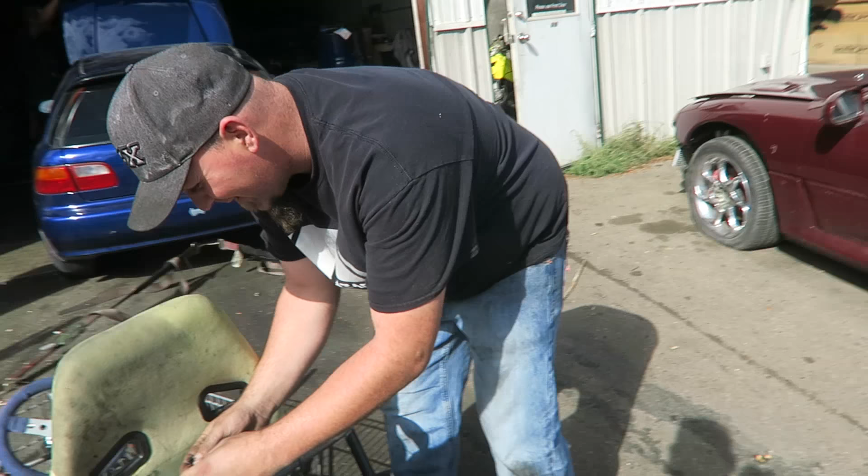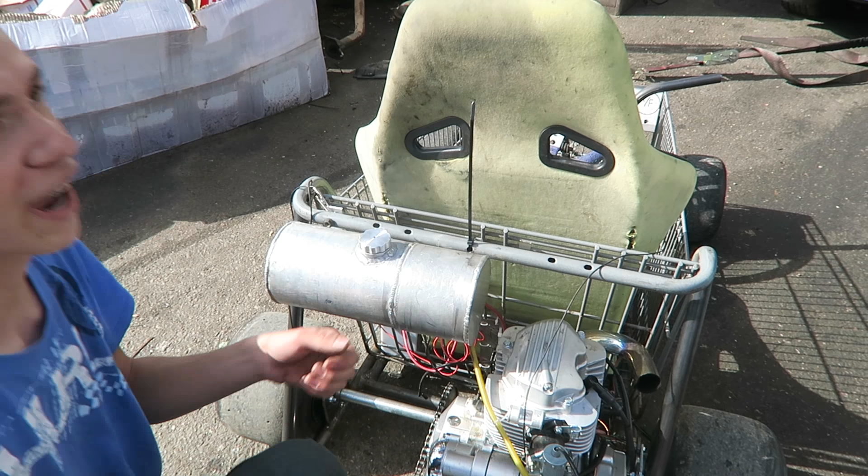You just run a zip tie through that bracket for that. Yeah, I need to, I forgot it didn't have brakes. And that's like going downhill. It rolls really good now, so it just goes. Those are some of the better wheelies it's ever done too. It scraped the back. Yeah, I can feel it, I can feel it ride it out. I'm pretty tall, but it's very uncomfortable. I mean, it's not horrible. Oh, yeah, oh that's snug. Snug fit. No, don't with that. It doesn't shut off.

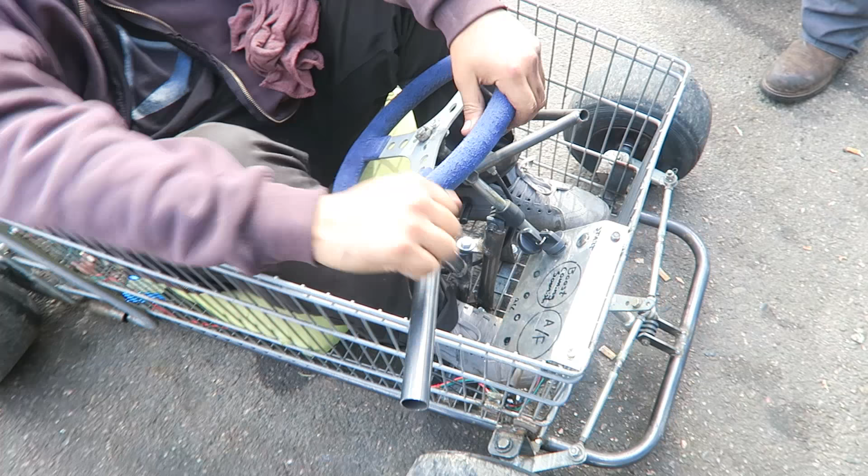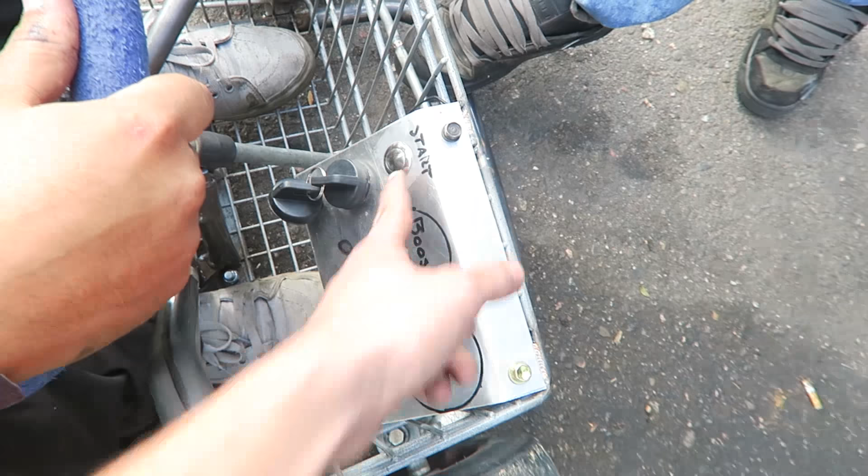Bro, I feel like I'm just gonna flip over. You better go try it out. Oh, you killed it, you killed it. I feel like a midget. Well, get riding it, look how you have to hit the gas. You gotta ride, how do you ride this? There's no kill switch, so there's no brake. So if you get stuck in gear... how do you get stuck in gear? That's the clutch, that's your clutch.

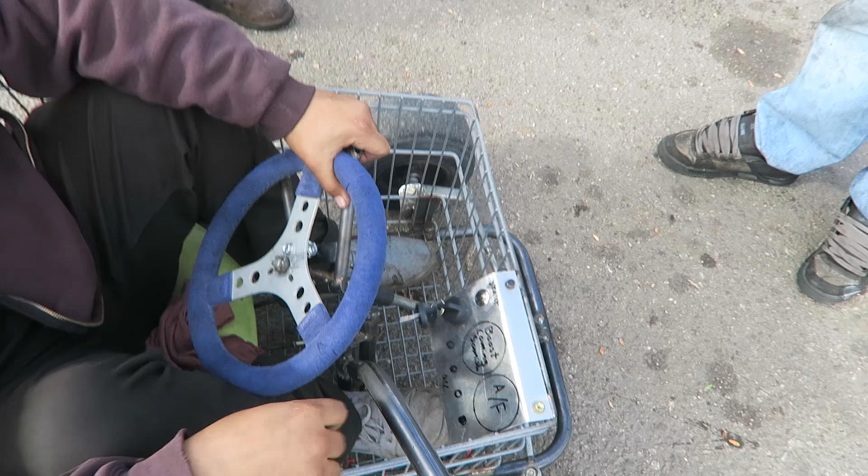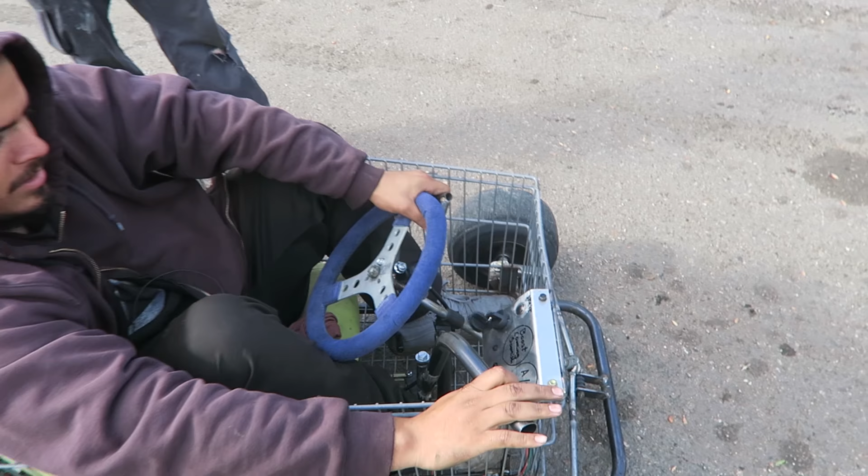And how do you... so one forward is first, and then all the way back is the rest. Alright, and then how do I turn it off if I need to? You can't. The key? You can't. No, where's that black— the key doesn't work. He's sitting on it. There's this, I kill it with this right now. It's the choke. What do you do with this? I pull on it. Hold on, don't give it a lot of gas. No, this is sketch, only this. Hey, just leave it in first gear.

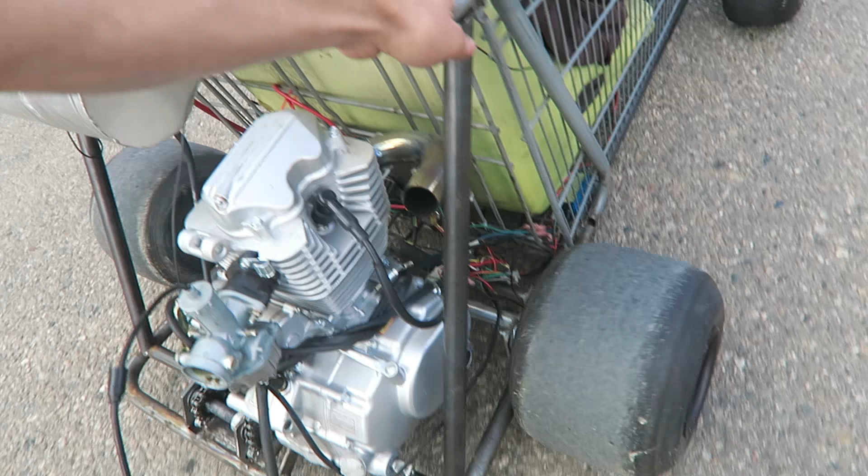Oh my god. Oh, it doesn't— doesn't sound right. Hold on, stop it real quick. Yeah, it sounds like it's not getting gas or something. Oh Jesus, I'm surprised you could drive it, honestly.

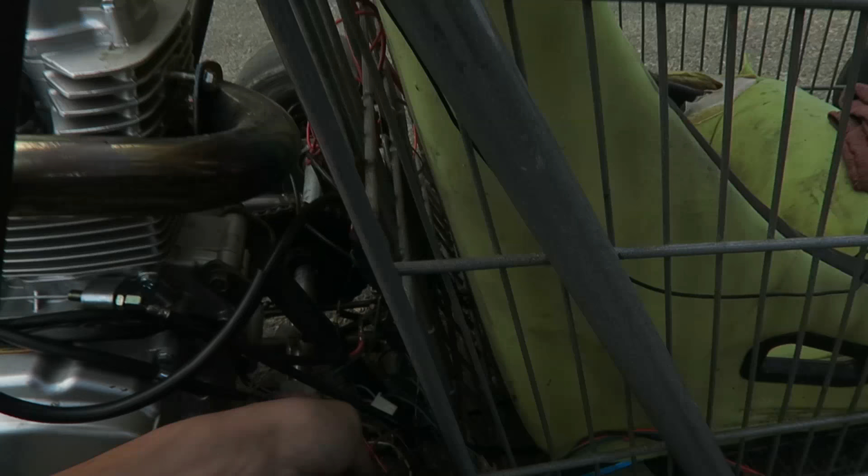Why? It's not that hard. I mean, yeah, it's not that bad. It just doesn't stop, yeah, it needs sketchy brakes. Damn, look at the wires. You like it though? Hell yeah. Feels fun? Nice. Yeah, I need to fix up some stuff still. We just need to get some brakes. Yeah, it really needs brakes. A cutoff switch, that's the only thing I was sketched about you driving is because there's no brakes, and it is kind of different though.

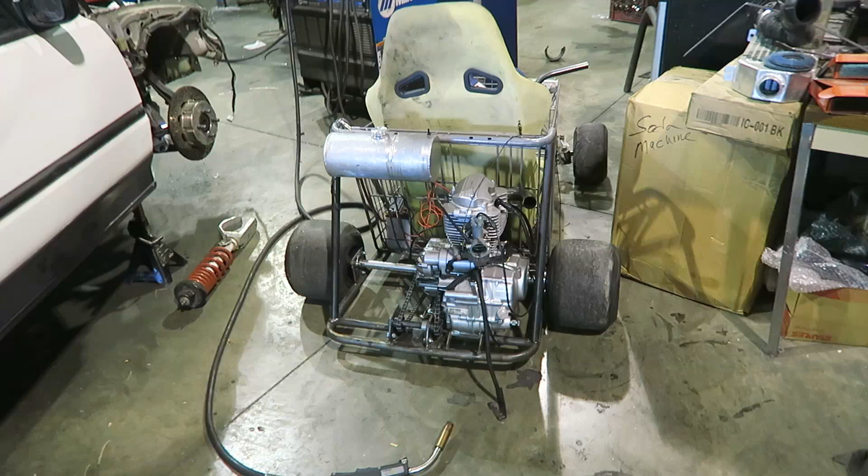So Brent has a car on the dyno right now, but while we were driving this thing around, this back support that I just put on broke at the bottom because I just have it tacked. So I got it all the way in the back of the shop, and I'm gonna get it welded up real quick while he's tuning that car.

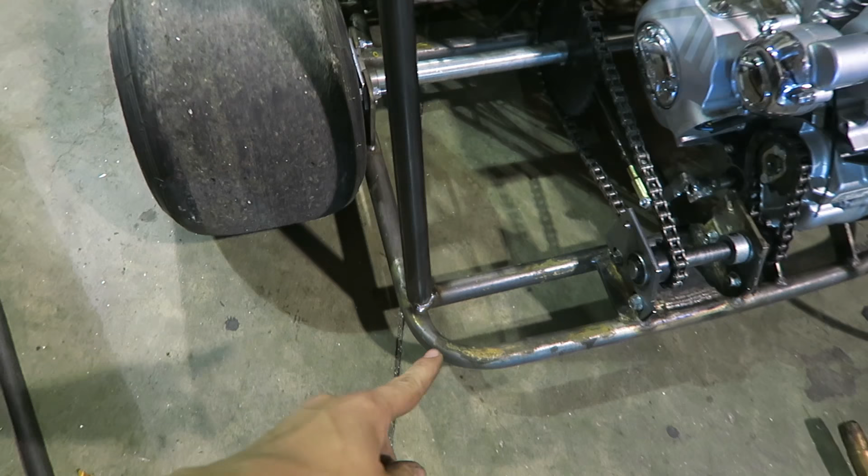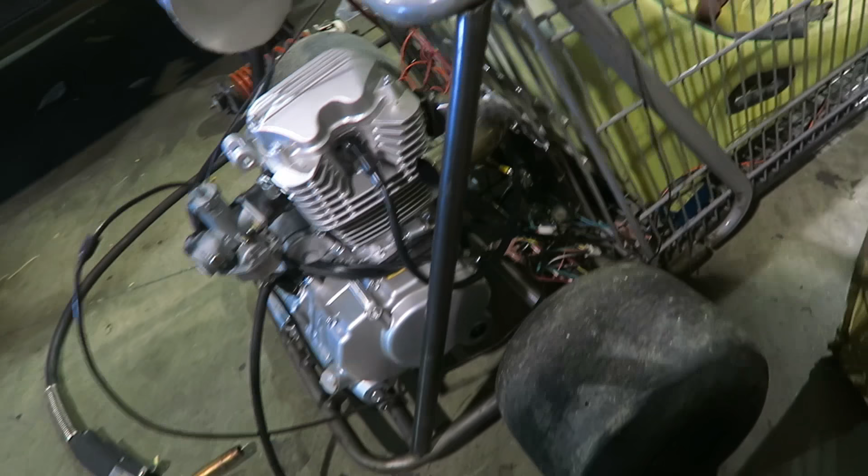But I did not tell you guys about these yet. I did add these the other day. These will add some strength to this back piece right there, because when it's doing wheelies and everything, it's putting a lot of load on the whole back of the kart right here, and it's kind of flexing that whole back piece. So these will be a really good support to have, and it also makes like a nice triangle right there. Not sure how I like the look of them, but they will definitely help with the strength of the frame. I'm gonna get them all welded up so they do not break off again.

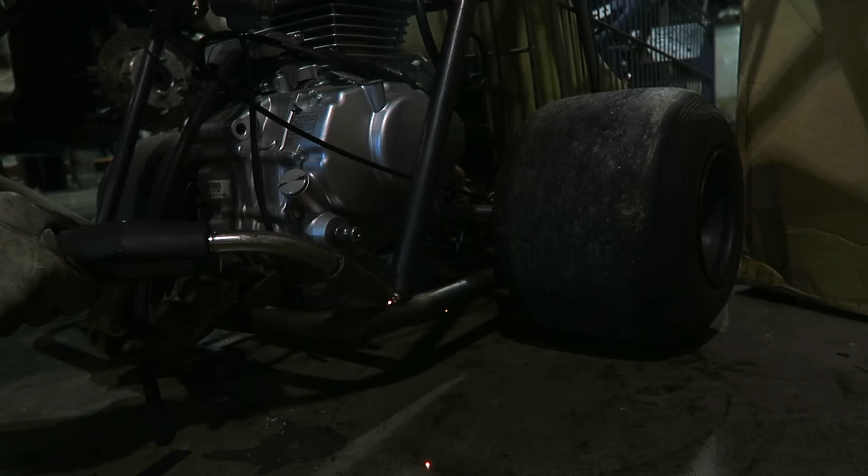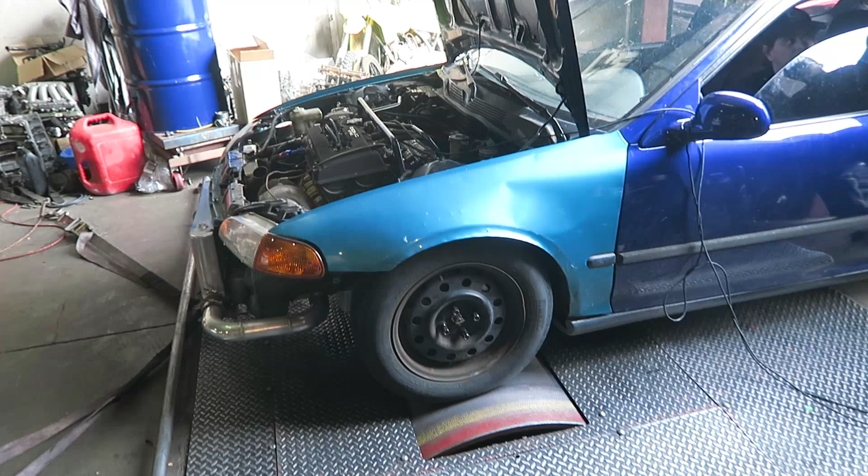Getting the Civic tuned. Yeah, need some dyno sauce. Trying to figure out that fourth gear from last time. Dude, I bet it was just because you didn't have gas. It was probably most likely. Yeah, it was under a quarter tank. That's probably all it was. But now it's full, so we'll see. About to lay down some real power. Hopefully it was just that. Yeah, I guarantee it was that, because my car does the same stuff. Right, yeah, at a quarter tank.

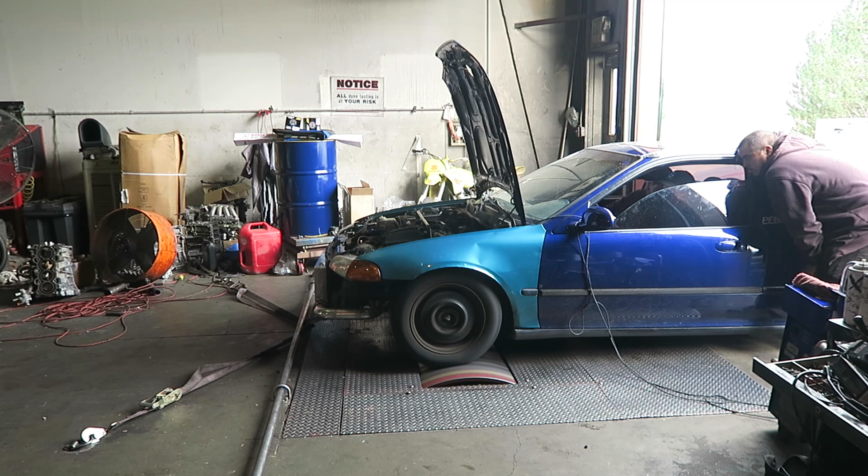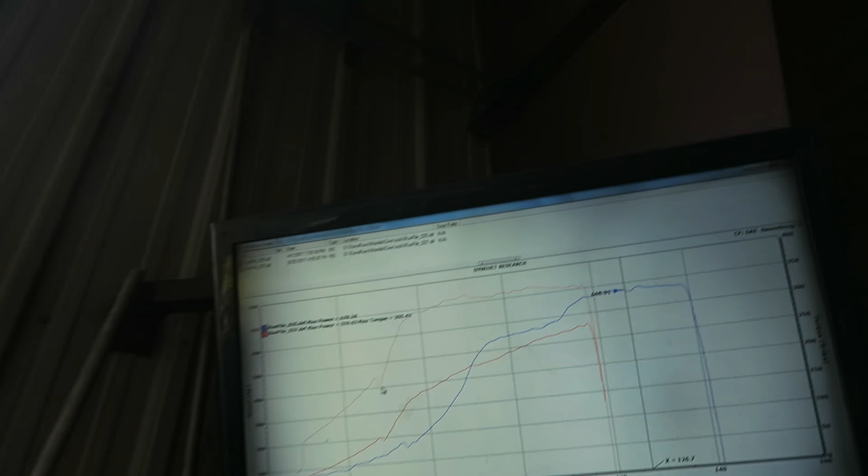Damn. 678, that's all it was. No, 559. Oh, 559? Okay, so it needs to be turned up. It only hit 18 pounds. But still, that's all it was then. Yeah, it was just the fuel the whole time.

Well, now you know for next time you go back to the track. No, half a tank, it was at half a tank and it was still breaking up like that. At the track it was? Yeah, and it was still breaking up like that. So it needs to be full. Yeah, you probably need to adjust that fuel pump, for sure, get it down in the tank more. Yeah, because it sits up too high so it doesn't draw.

At least you know. I'm glad that's all it is, really. Yeah, something stupid, you know? Well, time to turn it up. Yeah.

I want to see you make 700 again. Yeah, we wanted at least 7. Yeah, at least 7. Let's see what it does.

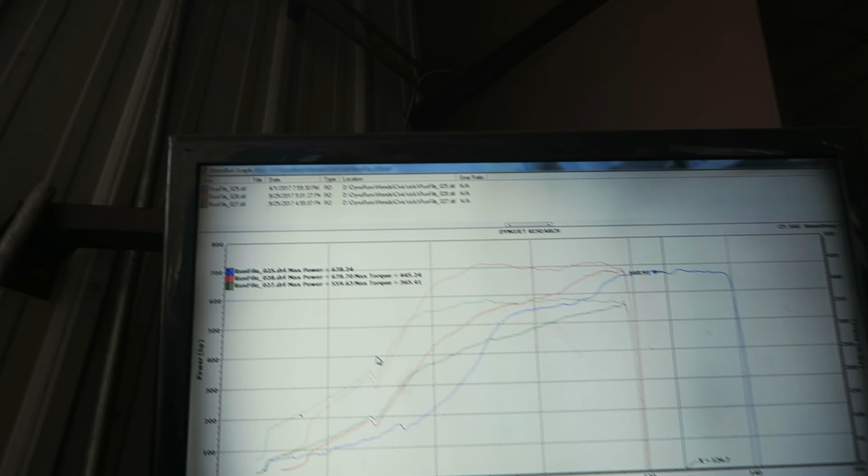678. That time I made 678. Same exact horsepower as before. Almost 700.

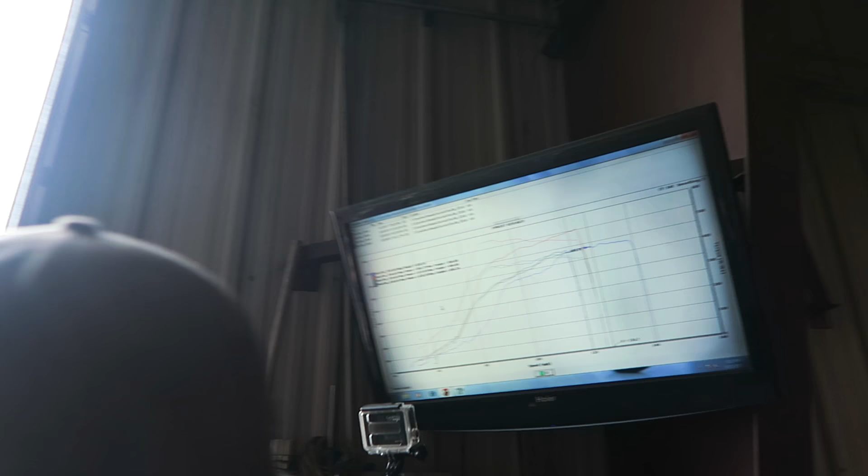Holy shit! 802 horsepower, bro. Holy shit.

You literally just said Ricky will be happy at 800. 81% duty cycle, 30, god damn, that's crazy. 80% duty cycle, dude, this thing's gonna get down. He said he wanted to turn it up. Wow, holy crap, that's gonna be fun.

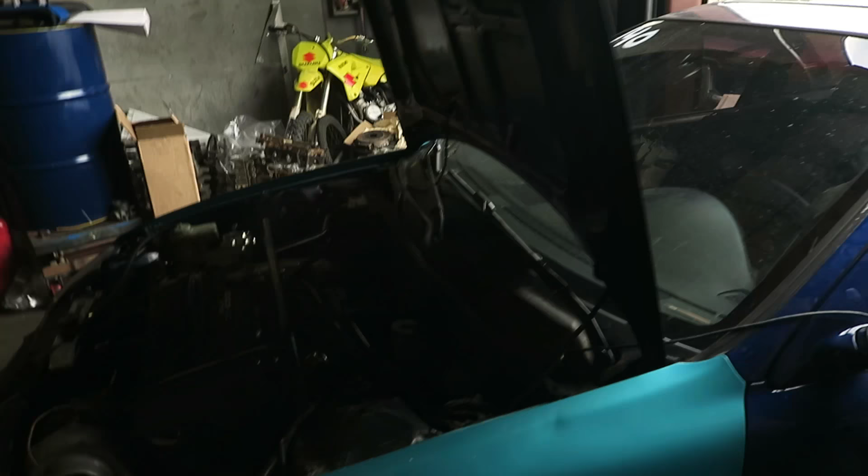I honestly thought something broke when it backfired. I thought something- I saw, staring at the gauge, it went to like 35. I was like, oh shit. Oh, god damn, 800 horsepower.

Well, now it's definitely gonna smoke my hatch. Different class now.

So what, we're gonna leave it there? Oh, you can't handle the truth. Holy shit, well, hell yeah.

I can't believe the pump- I can't believe it has the fuel for that. I don't know, man, that regulator, man. You might have to try one of those on your little hot rod. What is it? Oh, the Aeromotive.

Ready to take it to the track? Oh, yeah, this thing's gonna fly.

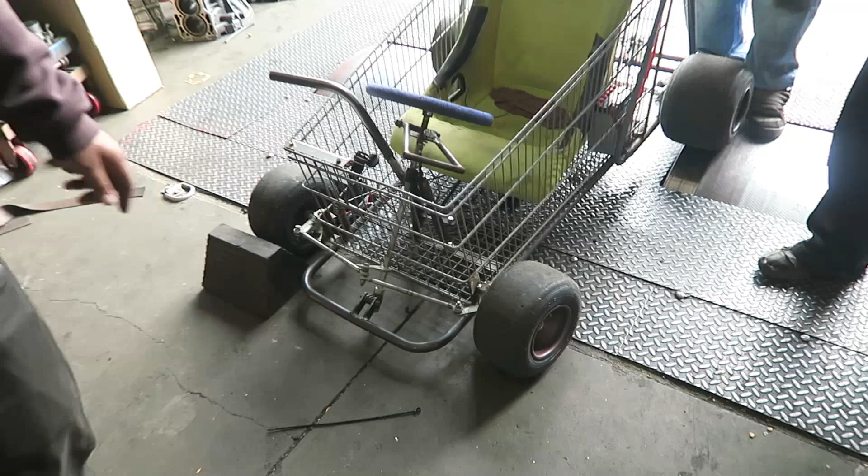Alright, now for some real power. Now we're gonna put the shopping cart. We're gonna blow those numbers out of the water. Just made 800 on the dyno, but now we're about to make 8.

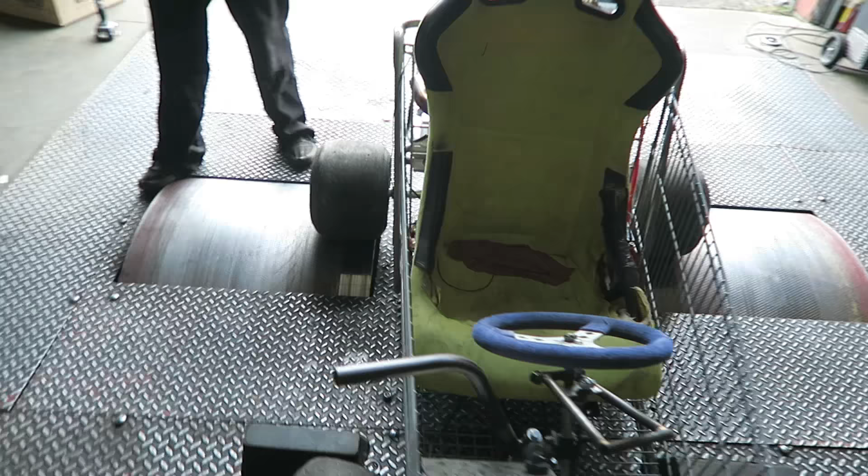Front pipe, got her chocked down. Got to get some straps. We just hold it, we just hold the straps. You guys could probably just hold the cart down. It barely fits on the dyno, but it works.

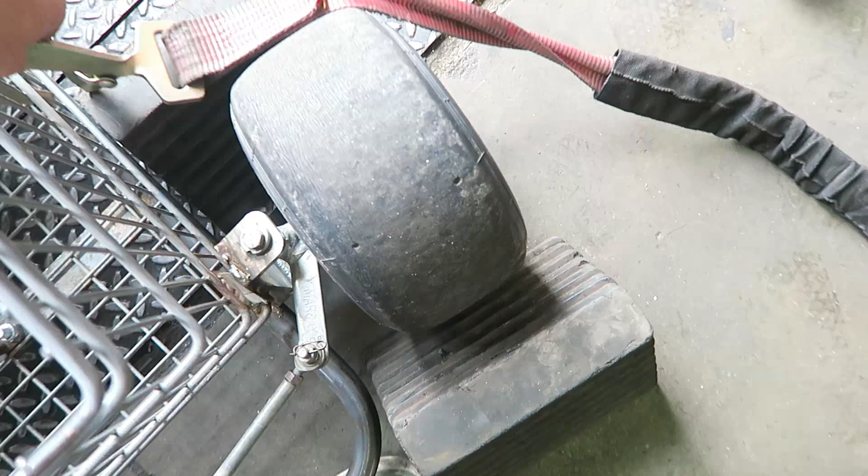See that sand rail? It might try to pull a wheelie. Yeah, we've done that a couple times with sand rails. I'll take care of it. You got it? Got Shane helping me out. We should get up top so we hold the front down. Oh yeah, that'll work, just don't go super hard with those because it's thin.

Alright, we gotta make a new run file for the shopping cart. The extreme sauce, I'll show you the new- Hey, we need the extreme strength dyno sauce for this bad boy. We're gonna be blowing these tires off.

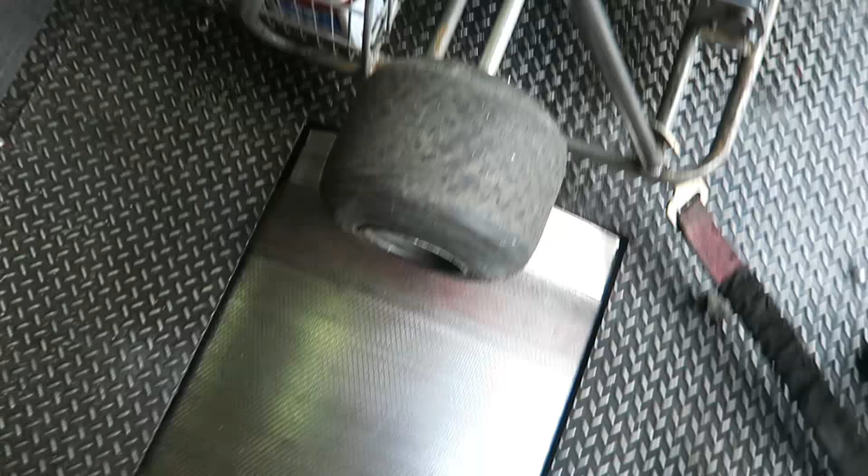Here, hold on. What? Dude, it comes out like glue. Oh yeah, oh dude, that stuff is sticky. Sticky, okay, that should be enough.

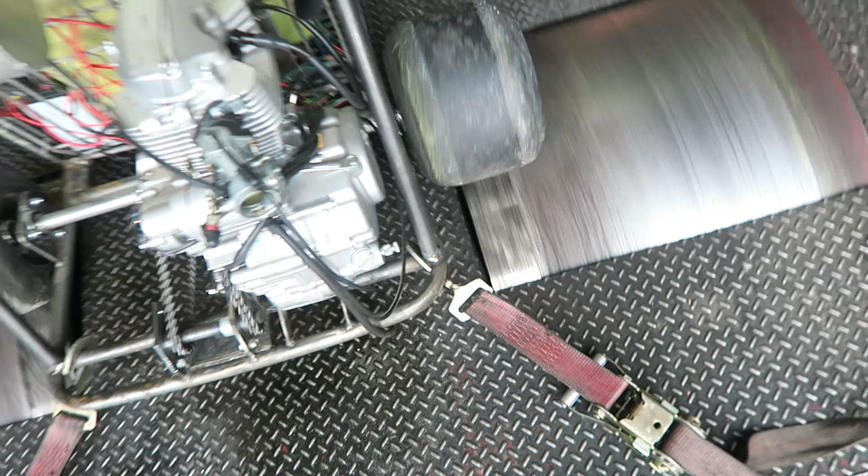Kyle, what do you have there? Got the extreme dyno sauce. Dyno sauce, dude, it rolls pretty good. Especially with the dyno sauce. Hell yeah.

What are your guys' guesses? It makes 16 crank horsepower from factory. I'd say a good 7. 7? I want to see at least 10. 8? 15? You can get that carb tuned up. Yeah, that's true, I need you to tune it for- You, me, better put the wideband on.

Are you actually gonna put the wideband on it? Well, yeah, wideband, I gotta plug the laptop in. That's what I was gonna say. You gotta sit there all that time.

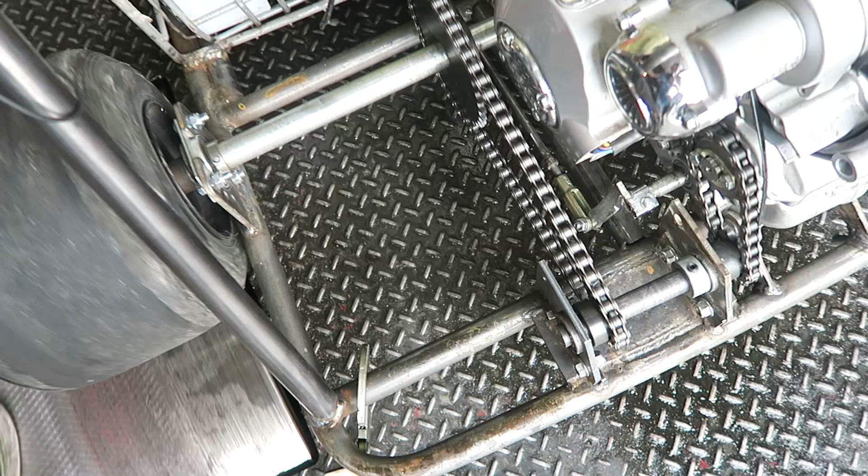Can get a good view of my jack shaft. It's all rolling real smooth right now. This chain's getting a little loose, but it's working good.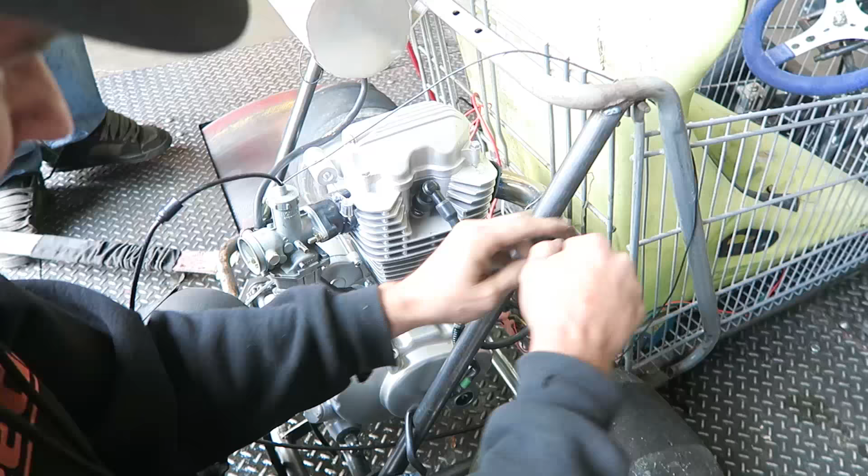Anybody know where the thing is? Damn, we're going legit, got the wideband installed. The wideband, yeah, how else are we gonna know what the air fuel is? Hopes and dreams, hopes and dreams. Dream close.

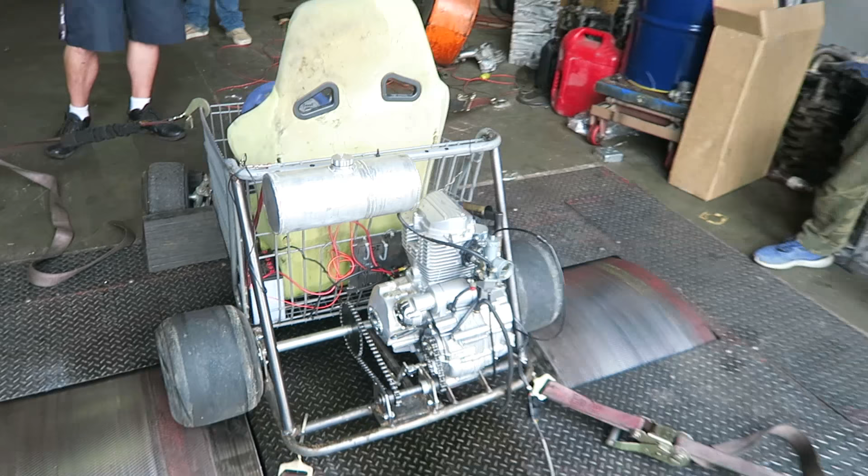So funny, dude, you gotta put like a 3-inch exhaust on it. Yeah, well, I'm probably just gonna leave it like that till I turbo it. Yeah.

What do you think it's gonna make, Shane? I'm just hoping for at least 10 horsepower. I'd be stoked at 10 horsepower. That's it?

Alright, Kyle. Alright, I'm ready. Slow it down. I can let the clutch out as well.

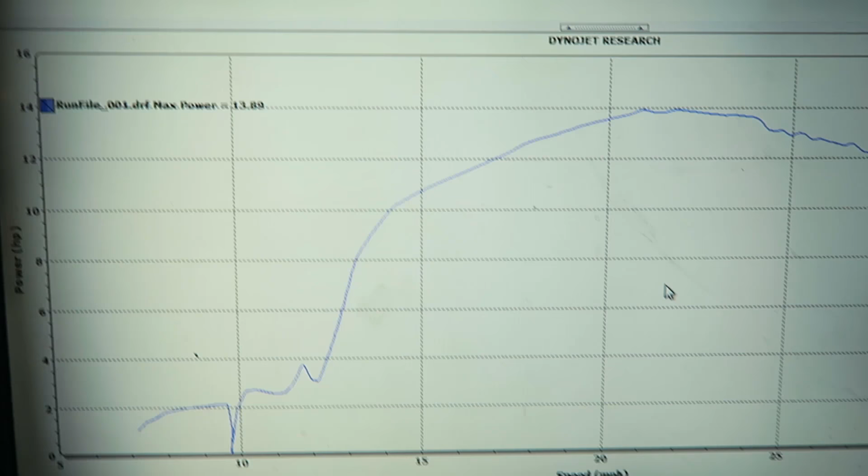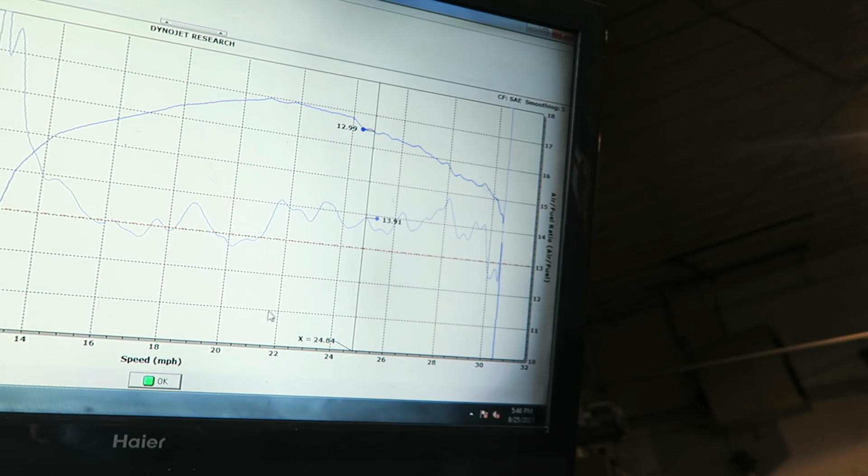Gas on the car. 13.89 horsepower. Now you need to run through the gears, it just needs a little more fuel on the top end. So it's actually going a little lean? On the top end, yeah, she needs a little touch, she'll pick all this back end up. It's so loaded down heavier than it would be, it's spinning a pretty big weight. 13.8 horsepower, now let's see what it makes in different gears.

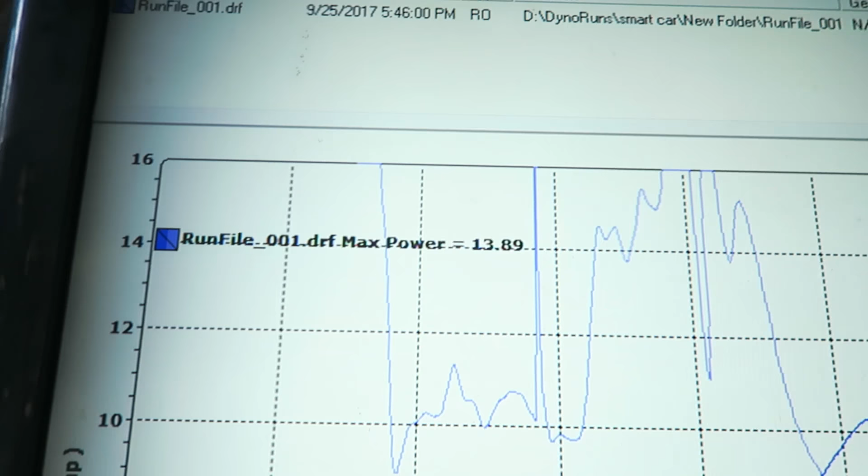You know how we launch them for the boost by gear? Just get going in first, then hit second, third. Just haul ass through the gear, max it out through each gear.

All right, and you went 32 miles an hour. That was 32? No, 31. Oh sweet, 31 miles an hour. I kind of want to top out 4th and see what that does, or 5th, I mean, see how fast it is. Going in first.

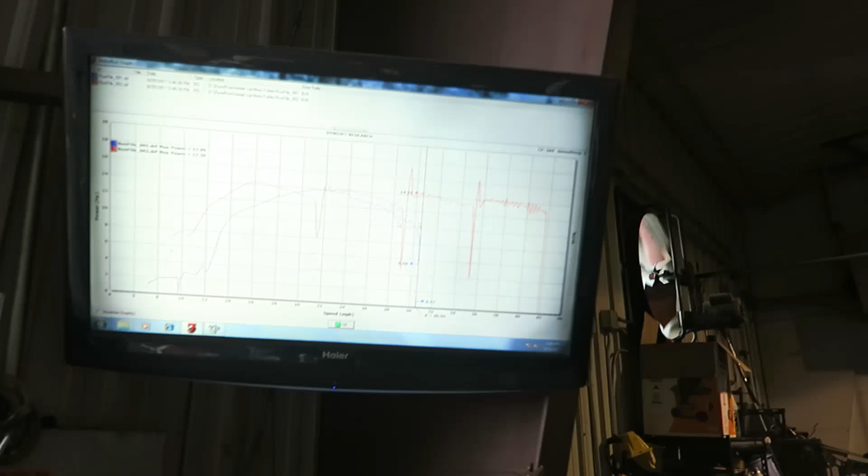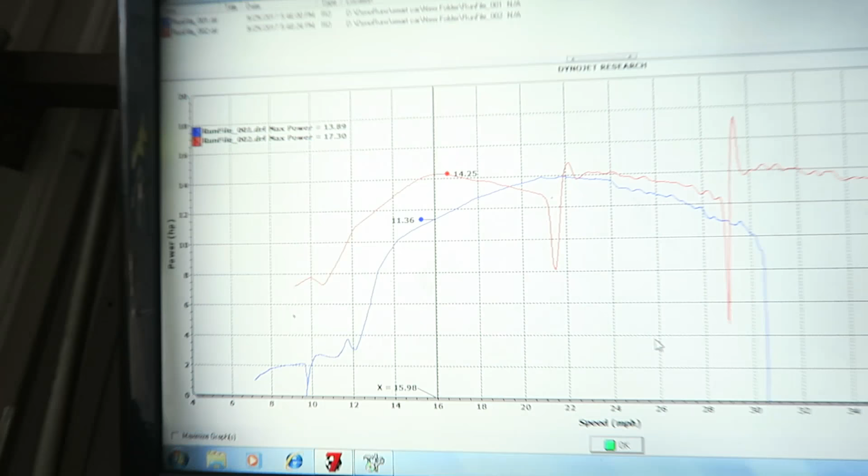Those are just shift spikes, but 14 horse. 14.1. 14.2 is the most, so maxed at 14.2. About 14.2. What was the mile an hour? 42 miles an hour, almost. I had a little bit left in it, but it pretty much goes 42 miles an hour.

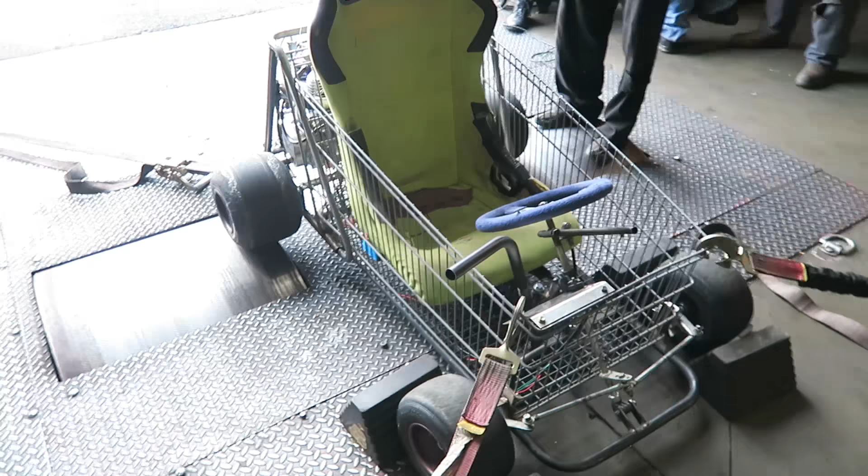So sweet, I've never ran it through all the gears before, honestly. Yeah, I've never taken it to 5th. That's what the dyno's for. So funny. Send it. I think he sent it. Yeah, I think it's been sent.

Any more? That was only 4th? What, that was only 4th? Yeah, I think that was... first, second, third, fourth, that's fourth. Oh, you didn't go, so I didn't even hit 5th yet. No, we gotta do it again. Means it'll go like 50.

All right, I kind of want to see what it would max out at. Yeah, it'll probably go 50. That's what the dyno's for, you're supposed to go big. I thought you were going through them all. I thought I did go through them all, but I didn't check if there was another gear. You were too excited. Yeah, I was, it was so funny. Do it again, all right.

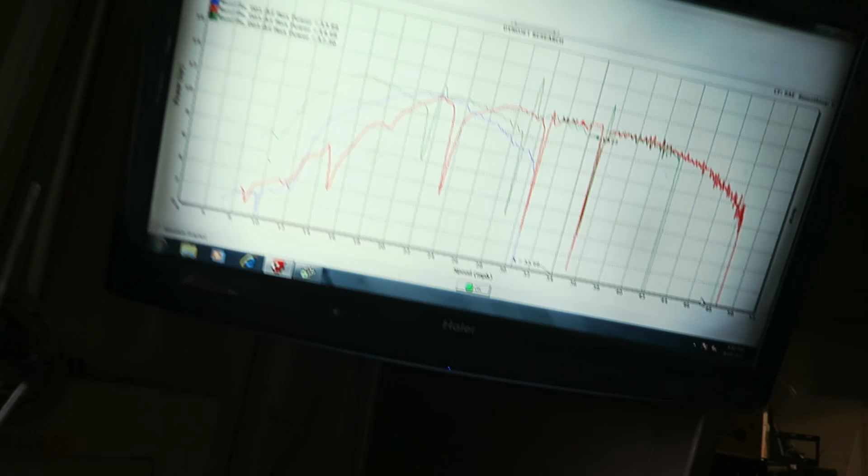Yeah, let's go grocery shopping. Shane, stand on the back and grab stuff, pulling out a cart behind it. We need to do that one night, huh? Rip through Walmart, grab stuff off the shelf, throw them in the cart. It definitely has way more load on this than just driving it though. Way more.

That's so funny though, that was awesome. I'm surprised it made 14 horsepower, honestly. That's sweet. Yeah, so now we got to see what a turbo does. 14.6 that time, so let's try to make 20 with the turbo. Oh, I think it'll make 30. Let's double it, let's do it. I'm so down.

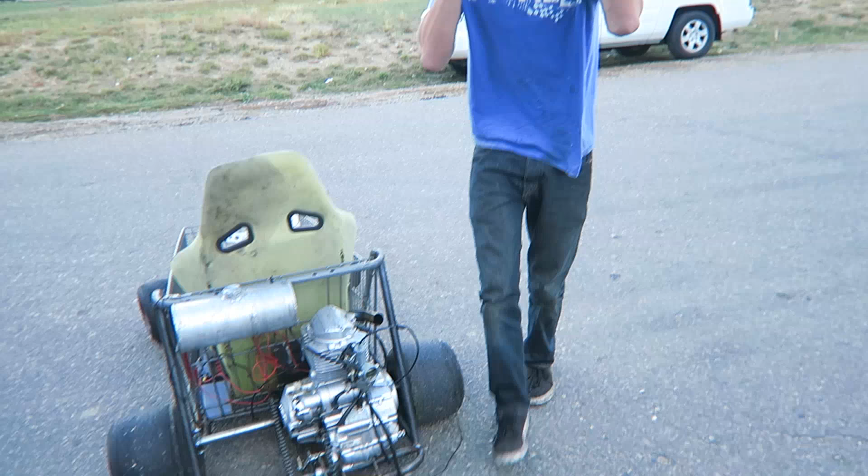Should have brought my helmet. The GoPro just slammed shut. That was pretty good though. Holy shit, alright, so I was trying to get some GoPro video on this helmet, and the only way the suction cup mount would work is on this visor, but it just shut right away. So I'm gonna take this off for now, maybe mount the GoPro somewhere else on the cart, but probably not. Yeah, that shut right away.

That bottom bolt on the shifter locked up, so that's why I can't get it too tight. I don't know if you could hear me, but I couldn't get it into the next gear. I thought maybe the clutch stretched out again on you. Yeah, it wasn't the clutch, that bottom bolt locks up and the shifter jams up. Gotcha, so once I break that loose, it'll be good.

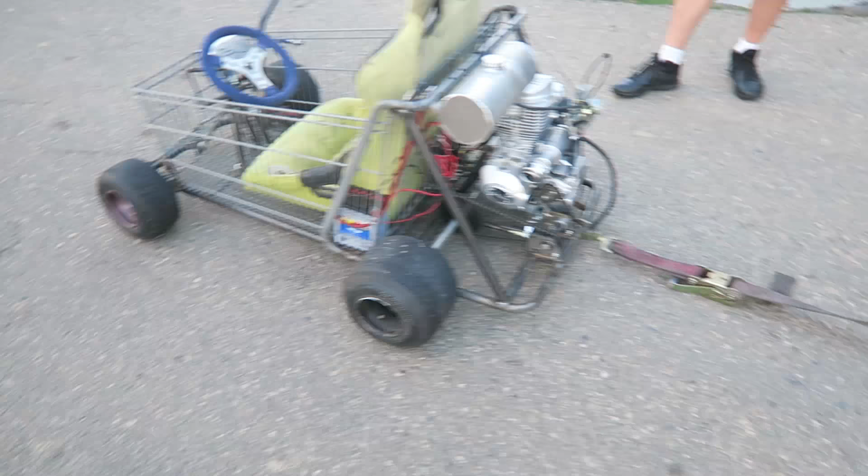All right, so we're gonna attempt to do a burnout in the shopping cart. We got it ratchet strapped to the back of the CRV. I really don't think it's gonna work, but I guess we'll find out. Jamie has faith that it's gonna work. Gonna water the tires down. I just think these are gonna have way too much grip, especially with me in it.

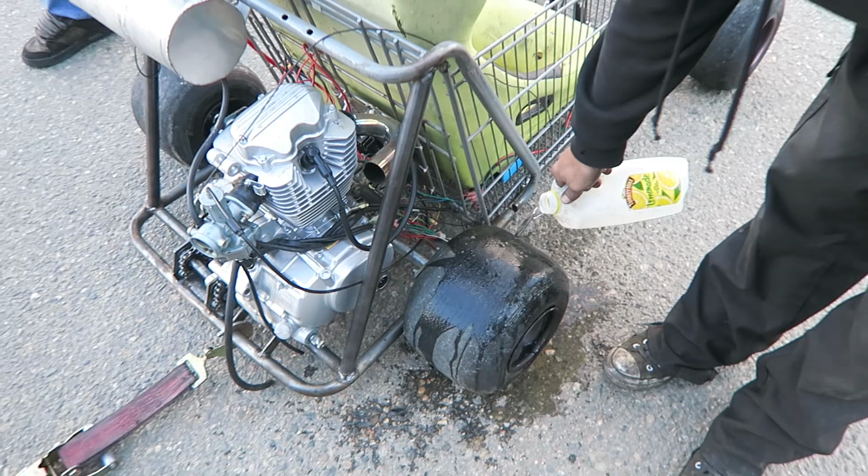Yeah, lean all the way forward. Yeah, gotta put all my weight in the front. Sit backwards.

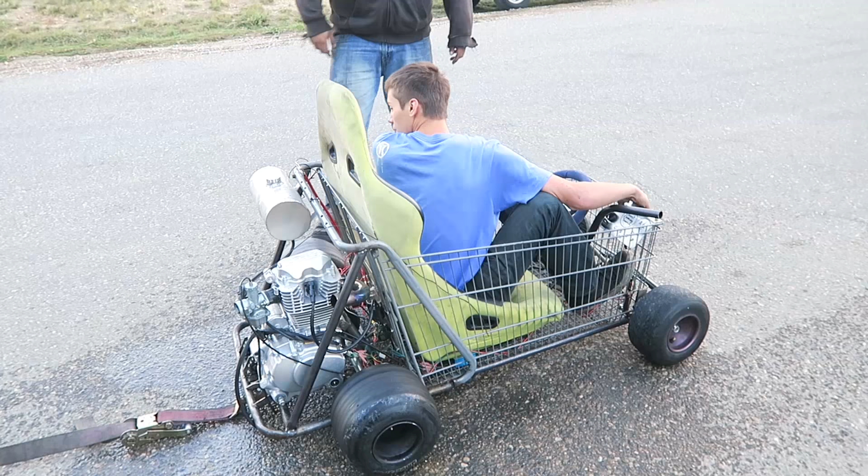There's a nut on the ground too.

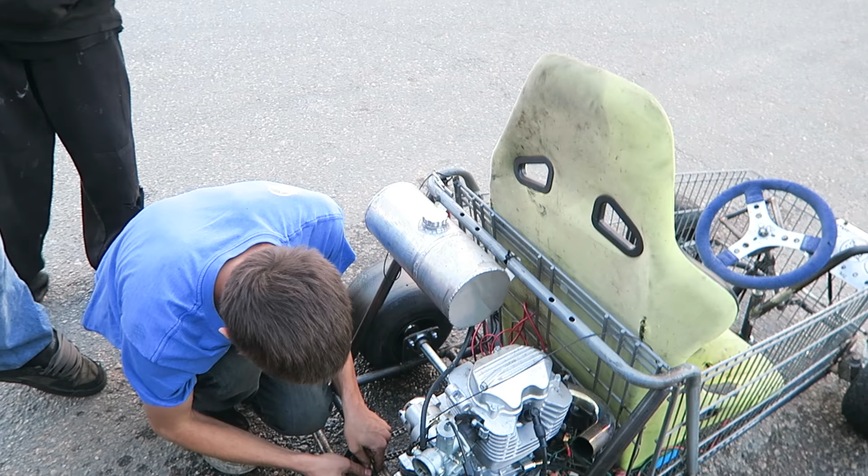Yeah, I felt it starting to slip on the chain. There's a nut on the ground. Oh, shit. Your keyway's coming out. The bearing, it took the bearing out.

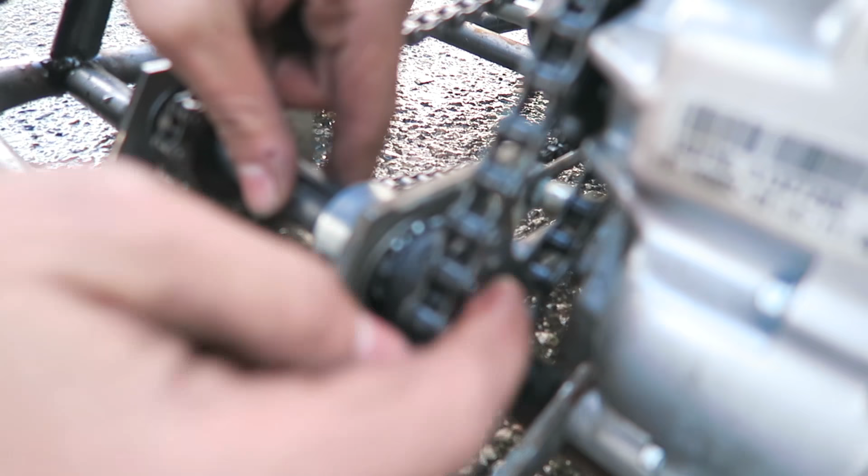Yep, damn, too much torque. Too much torque, the whole bearing came apart. CRV, man, just holding it back. That sucks. At least we got a burnout out of it.

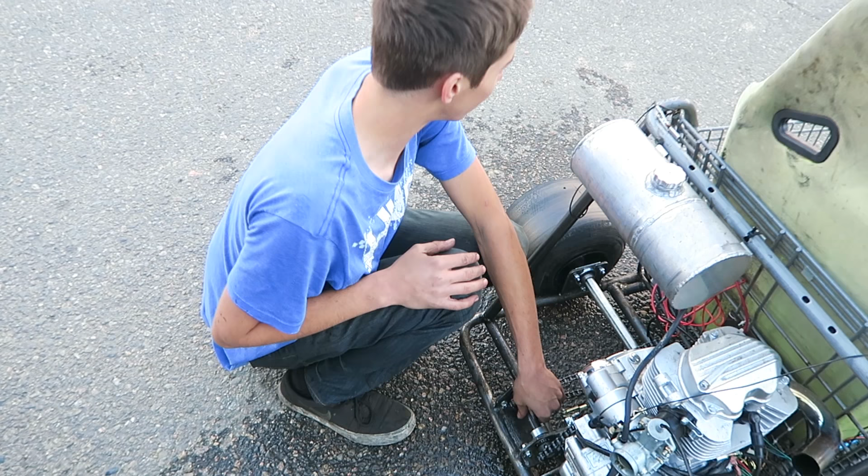Hold on, hold on. I did tell you that was gonna work, right? Yeah, you're right, you're right. I didn't think it was gonna work, but it started smoking. That was second gear too. Oh, those are sticky, those are like slicks.

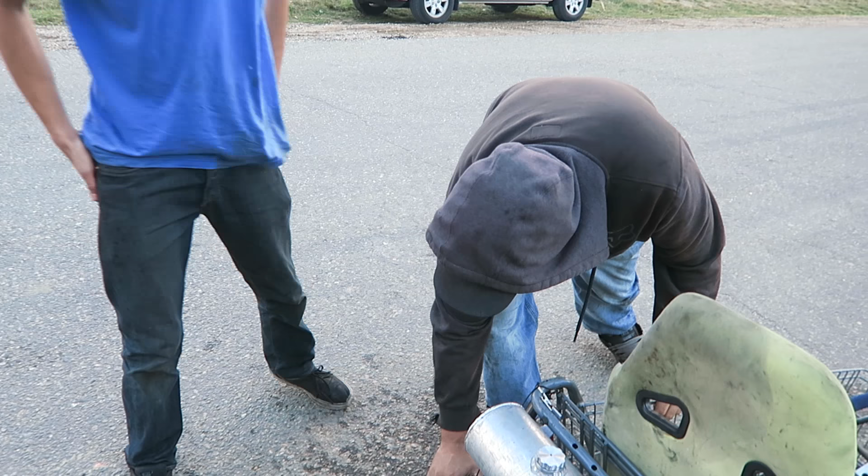Yeah, that's sweet, but now I gotta get a new bearing for it. Oh well, it was fun though. It was very fun. Feel that tire, I bet you it's even more sticky. Oh yeah, it's hot. Yeah, looking warm. Oh yeah.

We'll get that bearing fixed. We'll do a better burnout next time, for sure. CRV's just big enough to hold it still.

All right, so I made it home safely with the shopping cart. Everything's still in one piece. That little trailer worked great, so I actually might hold on to that thing instead of selling it. I might use it just to lug this shopping cart around because it works really good for that. I was actually thinking about making a hitch for my wagon and hooking that trailer up to it, then I'd be able to bring the shopping cart to meets and stuff like that, and I think that'd be pretty cool. So I may hang on to that trailer for a bit longer, but overall it was a good day. Hopefully you guys enjoyed that.

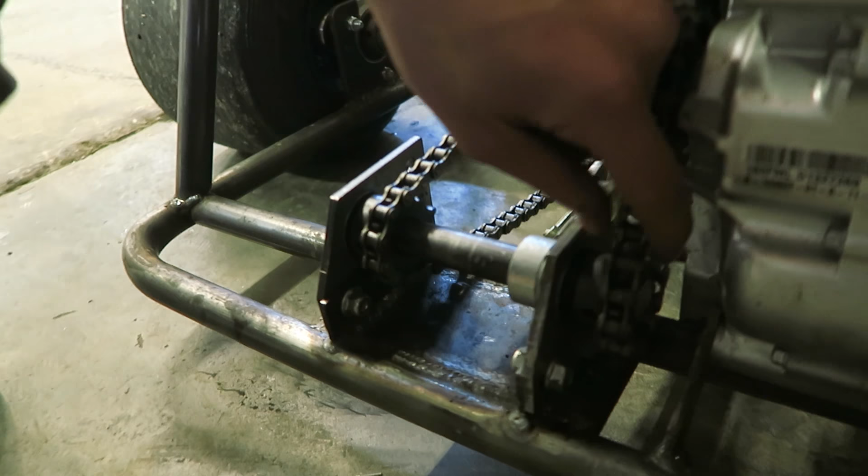Unfortunately, the driving around footage got cut short because this bearing right here decided to explode. I don't know if you can see it, but this jack shaft is super loose. Yeah, this whole sprocket's coming loose. So this whole assembly kind of came loose because all the ball bearings out of that bearing right there exploded. But I already have some more on the way, so that should be fixed pretty soon.

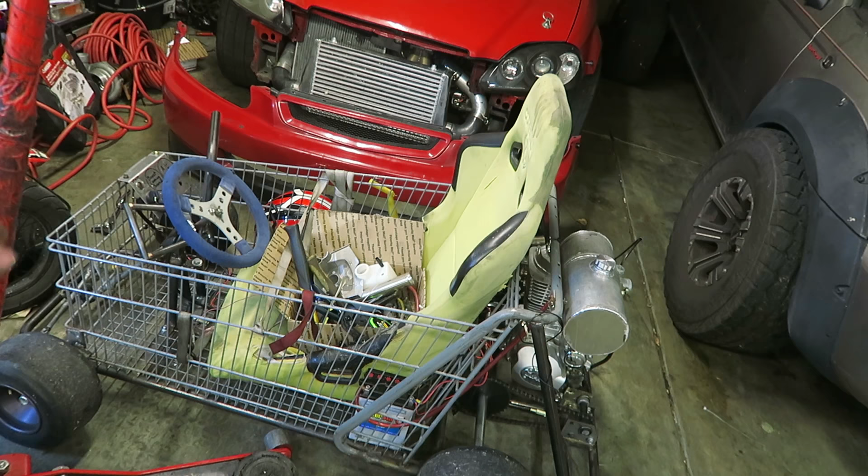And I just want to start cleaning everything up because there's still some ghetto things on this. I was pretty excited to get it over to the dyno and get all that done. But now that it's where I want it to be, I still need to clean up the wiring some. I need to get the battery mounted, and I need to either mount this seat in place or find a new seat because I'm still not sure what seat I want to run. This one's still temporary, but I may end up using it for now. I'm not sure yet, but I still need to do that stuff.

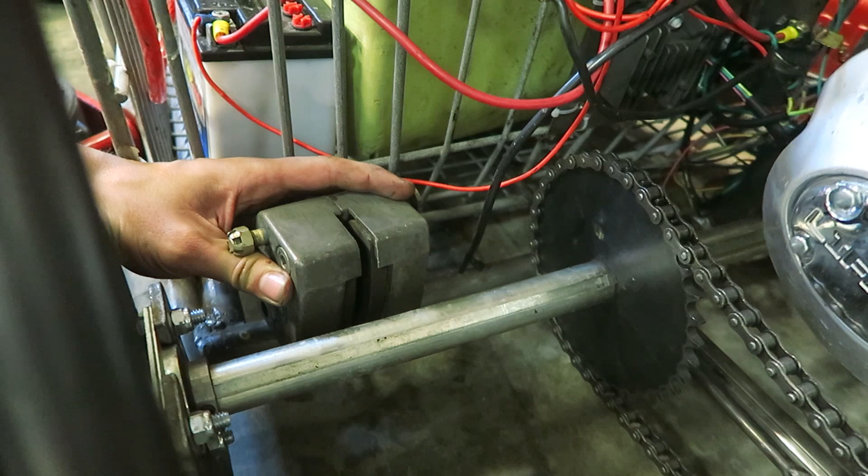And then for sure, I really need to get some brakes. I keep saying that, but I really do need to get some brakes on this thing soon. I do actually have a hydraulic caliper right here that Brent had from a long time ago that he said I could use, but I would still need to get a disc and the little hydraulic pump for it, like that goes on the pedal. And then I'm planning on mounting this somewhere back in here, about like that, and then putting a disc on it, like a 6-inch brake disc or rotor, and that should work pretty good.

But there will still be more to come on the shopping cart. It's definitely come a long ways, and I'm really happy with where it's at right now. But hopefully that was an enjoyable video for you guys to watch. I know I had a lot of fun. This thing is awesome, I'm actually really surprised it made over 10 horsepower.

It actually made like 14.5 horsepower on this motor. According to eBay, it's rated at 16 horsepower and 11 foot-pounds of torque. So it did pretty good, not too much drivetrain loss right there. And this thing is definitely a blast to drive around.

But yeah, I also did try to get some GoPro footage of me riding around in it, but I forgot my helmet and I was trying to borrow Emilio's, but the visor kept falling down, and that's the only thing the GoPro would stick to on that helmet. And then I think the video is going to be a little shaky coming from that switch panel right there. But I guess I'll see what it looks like in the editor.